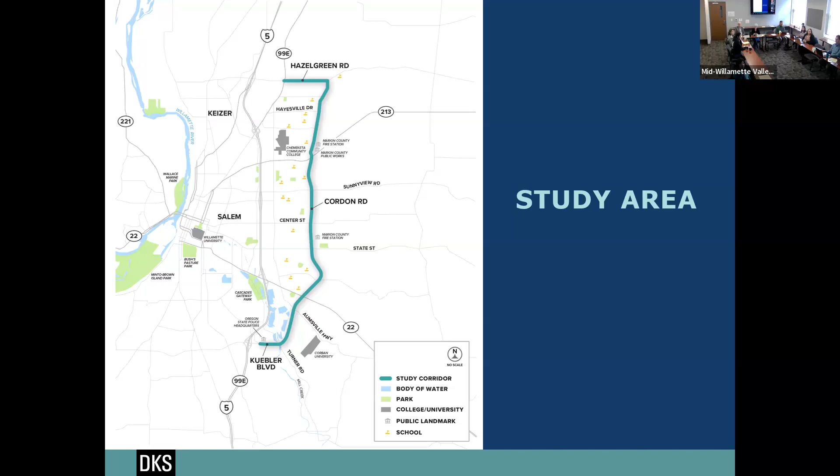Thinking through the original intent for this project, there was a very clear need for a shared vision and some consistent guidelines for access management along the corridor. It spans different parts of Marion County and the City of Salem, with a lot of transition between the two, and really the goal is to ensure that the corridor will function safely and efficiently into the future.

We had 6 main goals that drove the project, established at the beginning as part of our project management team, our advisory committee, and input from the public. Our main goals were: safety, to enhance safety for all modes of travel on the corridor; ensuring efficient movement of both people and goods; connecting users to destinations within and beyond the study area; supporting existing industry and enhancing the physical, social, and economic well-being of residents in the local area; making informed and responsible stewardship of financial resources; and finally, providing consistency with adopted plans and collaboration amongst all of the jurisdictions.

One thing I want to mention is that this corridor includes the potential future interchange at Oregon 22 and Cordon Road. That interchange has been studied several different times in previous studies. This project specifically focused on a plan for the corridor with or without that interchange being built — we did not assume the interchange would be there. We're really trying to make sure this project lays out a vision for the corridor either way.

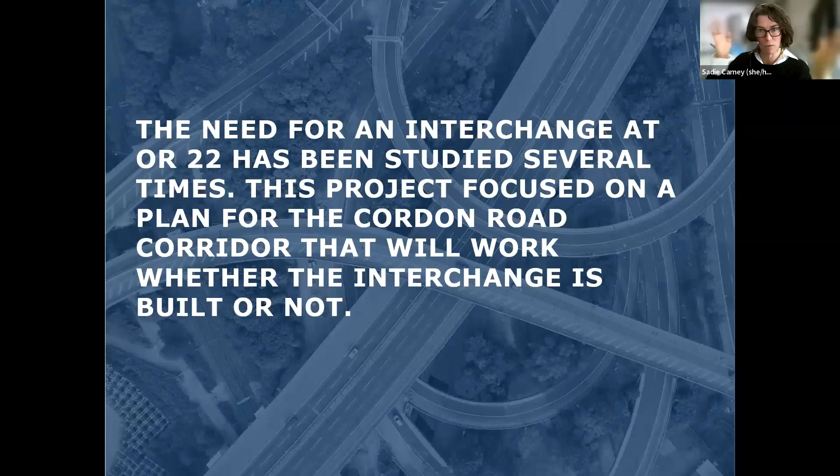I was just curious, there was a bullet on a previous slide and I was hoping for clarification — there was kind of a mixed message, I wasn't sure if existing industry meant we're supposed to be framing our minds around industrial zoning, or if existing industry is inclusive of all kinds of commercial activity going on. Yeah, it's basically all existing land uses along the corridor, existing businesses, residences, everything out there today. Okay, I just wanted to make sure I was understanding our aim here.

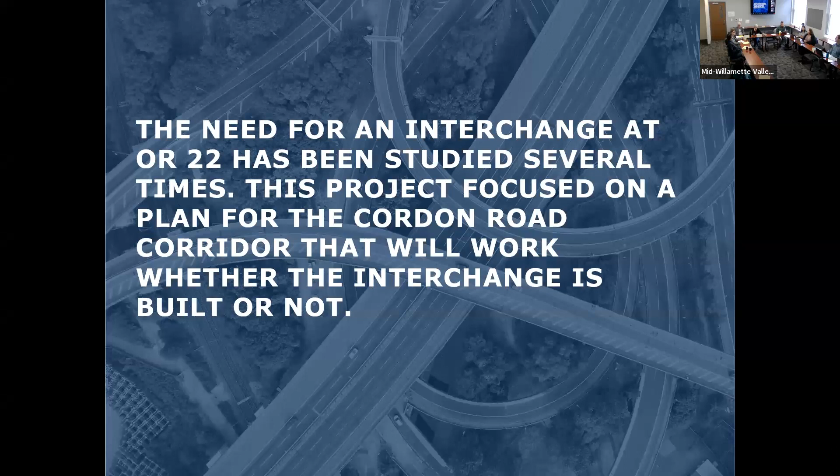Follow up — so the land uses, you have land uses in operation today, but there are also ones planned for on the Salem side, inside the UGB. So was that considered in this? So if it's not yet developed but it is zoned for X, that has been factored in. Okay, thank you.

We then did a detailed evaluation of the existing safety, multimodal safety and operations needs along the corridor. We also looked at the future 20-year potential need for vehicle specific demand, since that's what we have in our travel demand models, taking into account future development along the corridor based on the zoning and what would be allowed. We also had 2 open house events, which I'll touch on in more detail in a moment.

From all of that information, we developed 3 different alternatives for potential cross sections and traffic control along the corridor. We then took that back to the public and used their input, as well as our scoring criteria from the project goals, to settle on a selected preferred alternative, and then used that to develop a prioritized project list.

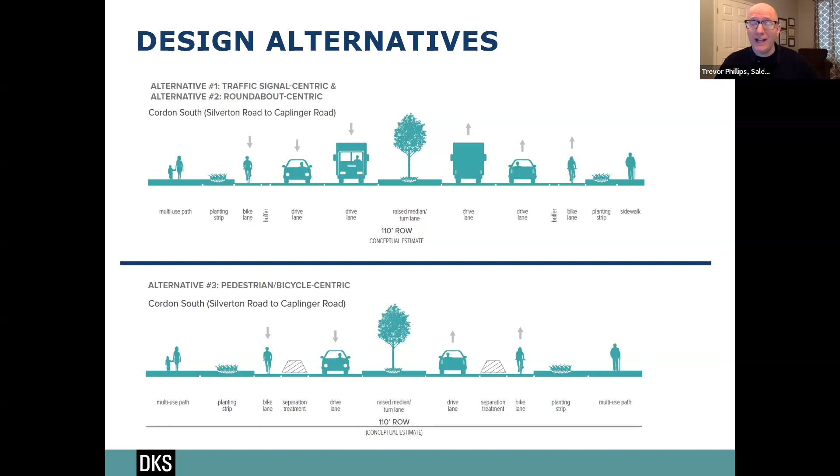Councilor Phillips has his hand up — it was mainly to second your comments, Chair Clark. That overpass where Cordon Road goes over 22 is all the things you said — it's not safe or adequate for this corridor. So thank you for highlighting it. Yes, correct, I was listening.

I'm raising my hand back up. Okay, go ahead. Sorry, can you back up a slide please? Down where you're identifying the definition of interchange, it says an interchange at the junction of Highway 22 and Kuebler — is that Kuebler there, or is it? That should be Cordon Road. Good catch, thank you. Okay, yes. Okay, thank you.

So after we evaluated all of the needs along the corridor, we came up with 3 different design alternatives. The main difference is that alternatives 1 and 2 had essentially the same cross section: 2-lane roadways widening out to 4 lanes with a center raised median, and enhanced bicycle and pedestrian facilities on both sides of the roadway.

The main difference was the traffic control. Alternative 1 assumed traffic signals at all of the intersections. Alternative 2 looked at roundabouts where they were feasible along the corridor as that traffic control. Alternative 3 was what we called our bicycle pedestrian centric alternative, where we did not expand the vehicle capacity along Cordon Road. We did widen the road within the right-of-way available, specifically to enhance bicycle and pedestrian facilities — showing separated bicycle lanes, much wider shoulders, and multi-use paths, but that did not add capacity.

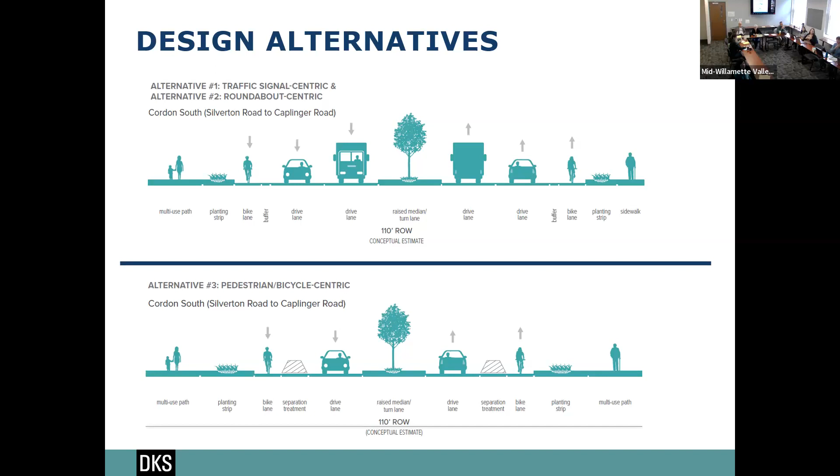So we took those 3 alternatives and brought them to the public, receiving a lot of great feedback in our open house number 2. We had about 170 people complete online or in-person surveys, with both online and in-person open house events. The in-person event had about 60 people attend, mostly residents along the corridor.

We used feedback from the public during that time, as well as our selection criteria from the project goals, looking at safety, mobility, connectivity, economic development, the feasibility of those projects, funding potential of the alternatives, and of course input from the member agencies from both the county and the city.

Looking at where we landed with our selected preferred alternative, it was kind of a hybrid of all 3 — that's where we ended up.

So the very north end — I'm going to go through this corridor piece by piece. Jenna's handing out a hard copy of this for those in the room, and we can email the hard copy to those on the phone.

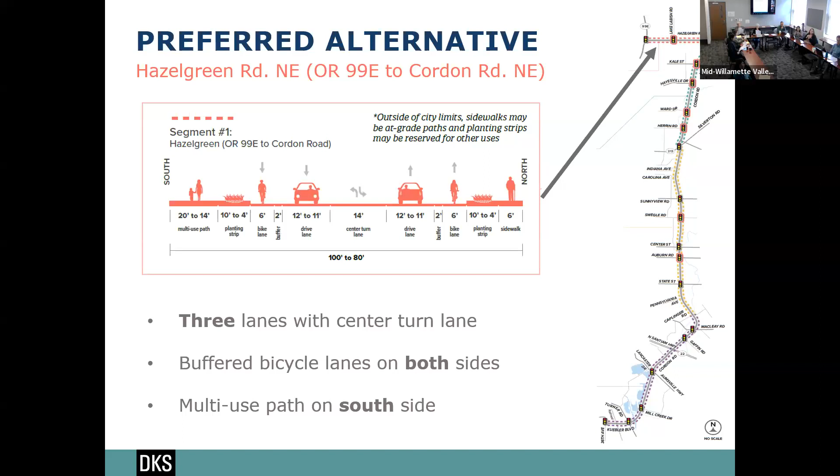Next, moving from north to south along Cordon Road between Hazelgreen and Silverton Road: again maintaining 2 vehicle travel lanes, adding a center raised median, widening the shoulder on both sides of the roadway. On the west side, the city side of Cordon Road, there's a wide multi-use path for both bicyclists and pedestrians. This difference between the multi-use path on the west side and the very wide shoulder on the east side reflects the county/city, urban/rural context — Cordon Road is that boundary and serves both purposes, so we're trying to match the cross section of the roadway for both contexts.

Question: so on segment 2, there are a number of intersections that need receiving lanes for the turn movements. Are those — so you'll have to have the gaps in the raised median. You can't go straight into a travel lane.

Yes, so this segment is kind of in between intersections — this is what the cross section would look like. At all of the intersections, it would widen out for turn lanes and receiving lanes as needed. But in between intersections, there would be 1 travel lane in each direction, which is what's out there today.

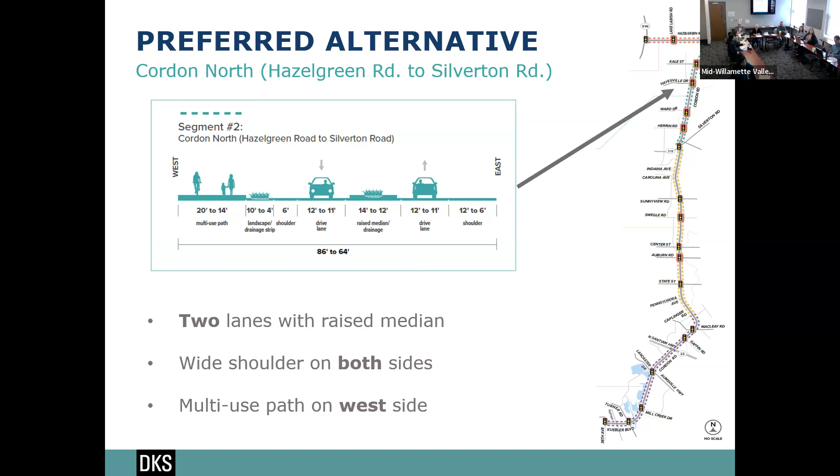Go ahead, next slide. So moving farther south, south of Silverton Road is where the vehicle volumes are significantly higher. So we've widened out to 4 lanes, 4 vehicle travel lanes at this stage, still maintaining the wide shoulders on both sides as well as the wide multi-use path on the west side of Cordon Road.

One more. And then the very south segment, this is primarily in the city limits, so the entirety of Cordon Road is within the city jurisdiction here. Again, that 4-lane cross section. The main difference on the south section is that there is multi-use path on both sides of the road, primarily because of the level of development and zoning that exists today and could exist in the future, accommodating bicycle and pedestrian travel on both sides.

Anna: I just want to make sure I understand what you were talking about before you moved to this segment, which would be limiting the left turn out to go southbound on this whole corridor. It looks to me like that would happen for this section as well. So I think what I'm hearing is the whole section will not allow, like if you're on the east side, you can't turn left and go southbound on Cordon. Correct. Okay, so really it's going to be an access control move for the entire section, correct? Correct.

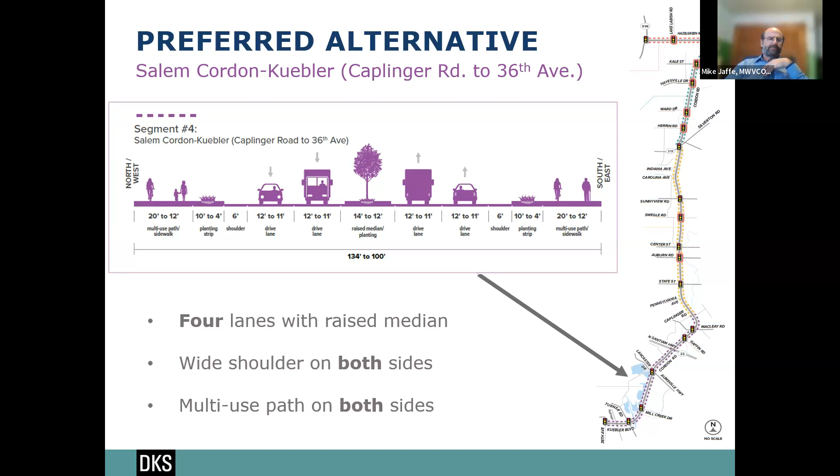Makes sense, because of safety reasons, right? I mean, it's a busy road. Yeah, is that what - I think that's what you were saying. Sorry, I missed it. Yeah. So that's where - so that we did confirm that? Yes, okay. Because we're treating the east side as rural. Correct, and the west side, that's how it's - yeah. Sorry, I missed your point, Katie.

Councilor Phillips? Yeah, I just want to confirm that in this part that's purple, that's in the city, I don't think there are any residences that back up to this part of the corridor. So there's no driveways. As long as there's no driveways, I think this proposal is okay.

And then I guess it's not in the jurisdiction of the city, but the part that's north, it looks like on - I'm bad with the names - Hazel Green has the center turn lane because there's a lot of residences. I'm just curious why they chose not to have the center lane for left-hand turns in the northern part of Cordon. It looks like there's a lot of driveways in that section, and that's why they typically have that center turn lane.

Yeah, I would say the biggest driver for that decision is safety. And yes, there are a lot of driveways in that section, and that's also where the highest density of crashes and fatal and severe crashes are happening. By eliminating those left turn lanes, you're drastically improving the safety of the corridor.

Okay, so it's literally like we understand based on engineering that it's going to be difficult for the residences that back up there, but there are so many safety issues that stand out that the recommendation is to build something that creates a force function that really limits residential access. Okay, I can understand that. Thanks for letting me process it.

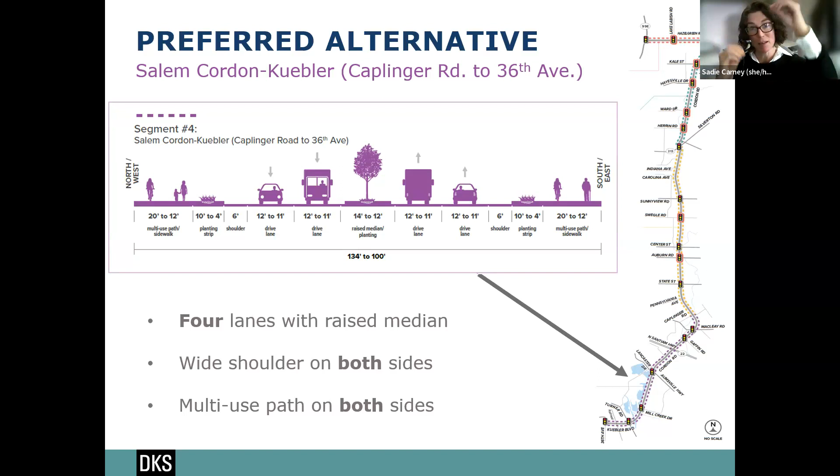Sadie, then Trevor. Thank you, Chair Clark, and thank you, Maria, for those comments about students. I'm also thinking, going back to Trevor's earlier concerns about vehicle speeds and roadway design lending itself to different kinds of travel behavior when you're in a car. When we have those limited lights and signals, that puts a big distance between the opportunities for a pedestrian to cross, unless they're doing so illegally. And four lanes is a lot for a kid to make it across. I wouldn't want to think about a student or anyone attempting to cross.

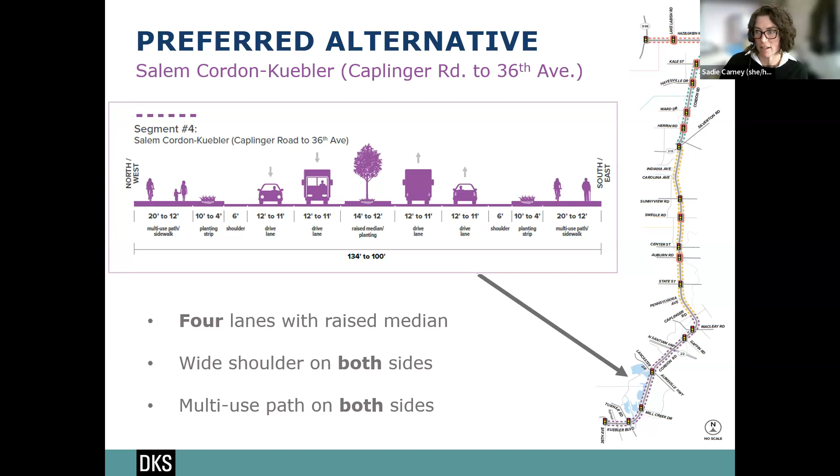I wanted to just clarify for the consultant group. I'm looking at the comments that were submitted by Transit to the project website, and they say: in support of potential future public transit service on Kuebler Boulevard, Cordon Road, and Hazel Green Road, pedestrian infrastructure should be provided where ADA compliant bus stops would conceivably be built. If speed limits are 40 miles per hour or above, bus pullouts shall be provided as designed for a 40-foot bus in the figure on page 700-11 of the ODOT Highway Design Manual. So I just want to clarify for the group and the consultants that Transit is supportive of pedestrian infrastructure on both sides.

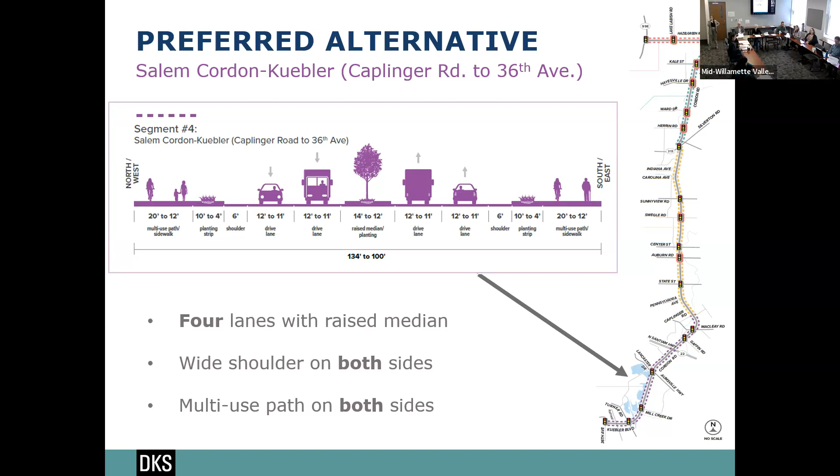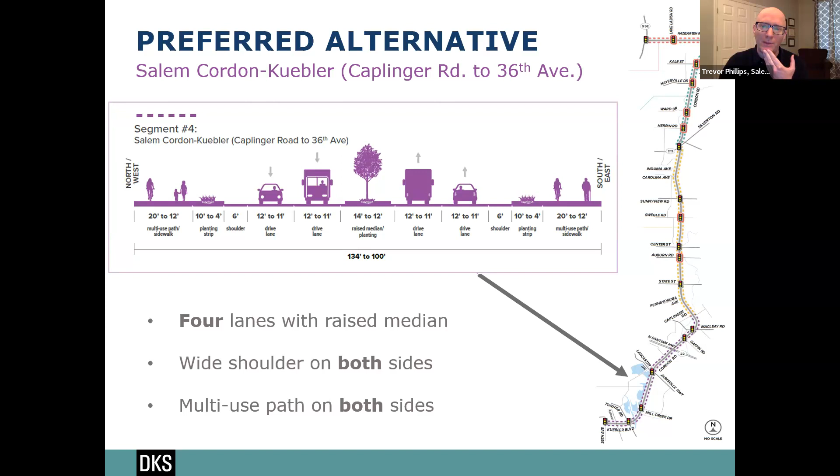Thank you, Chair Clark. I think it would help me if we went back to, this is like segment 4, if we went back to maybe segment 3 -- and this would be north of the section 4 we were just discussing. So I hear the concerns of Member Carney and Maria Hinojos Pressey regarding having infrastructure just on one side. I guess my question is, currently there's no infrastructure, no sidewalks on either side in much of these areas. Is the intent of the up to 12-foot shoulder to kind of function in lieu of having a sidewalk? I understand that probably saves money, and it acknowledges that one side of the road is county, and it's better to have some infrastructure as opposed to none, which is the current state. But it would help me understand that wider shoulder on the county side, the east side.

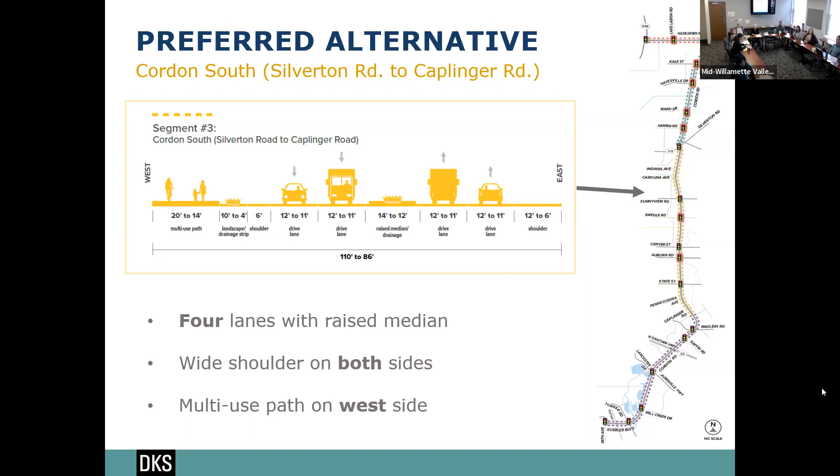So we kind of briefly touched on this, but the circled intersections here on this map would all have upgraded traffic control, so new traffic signals or roundabouts.

The roundabouts are definitely the traffic control that would improve safety the most, and would also really help facilitate those U-turns that would be required after people turn right out of the local streets and driveways.

The roundabouts are specifically focused on the north side, north of Silverton Road, where we have that two-lane cross section, as those could be single lane roundabouts. The project team, looking at funding and feasibility, focused the roundabout recommendation at those locations where they could be single lane roundabouts.

On the south end, at some of the signalized locations, we looked at the potential for even a dual lane roundabout, and those were not sufficient to handle the future volume forecasts that we had. So we retained traffic signals farther to the south in the corridor, and focused those roundabouts on the north end.

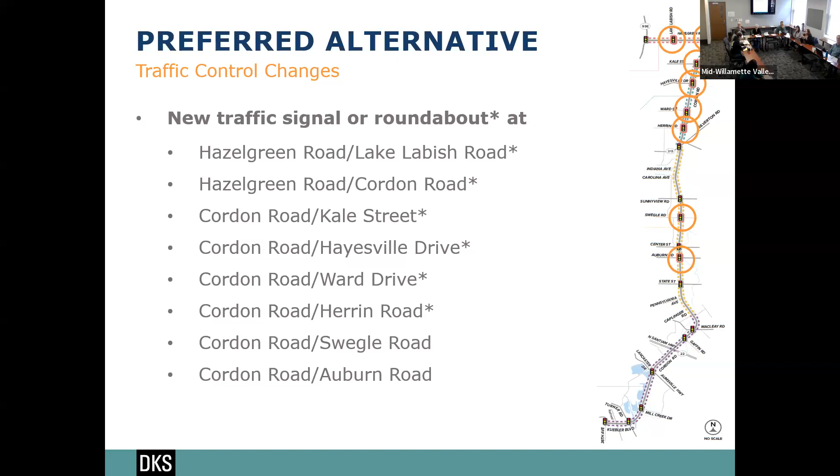Love me those roundabouts.

This actually works in our favor because it's not a full movement driveway. So even a right-in, right-out driveway like we have still reduces travel speeds. But having full movement access impacts mobility as well as safety. So really we're trying to balance the need for retaining access to these properties and local streets, while really trying to improve safety and reduce crash risk.

And so the plan also outlines strategies and best practices, as well as suggested criteria for managing access in the future.

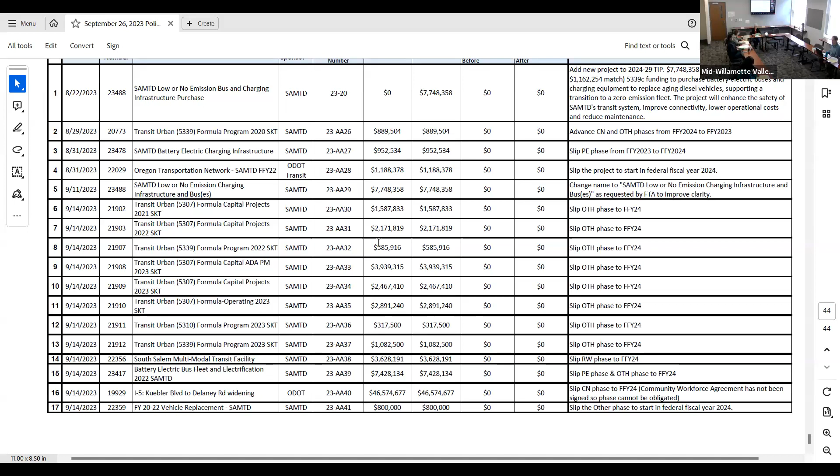The very first one is an instance we talked about last month, the battery electric bus addition and approval for purchase by Cherriots. But all the rest of these were administrative amendments and didn't impact any new funding coming to our region, just a list of administrative changes. I'm happy to talk about any of them specifically if anyone wants to, but the majority are programmatic transit projects, things like regular preventive maintenance and operations and capital projects. So that's my report, unless there are any questions.

And for folks who love all the different fiscal years, the federal fiscal year starts on Sunday, October 1st. Sure does. Seriously, they have to be special. Always, yep, thank you so much for keeping track of all of those.

Much appreciated. Other business: the Oregon Transportation Commission will meet on November 9th in Portland, and December 11th will be a virtual meeting for the OTC. The next SKATS meeting will be on October 24th, and we'll be considering the adoption of the McGilchrist and 22nd project. And then we'll have a presentation on the Cherriots Transportation Options Strategic Plan.

Looking forward to that. And then the next TAC meeting will be on October 10th. You also have the status of 3 of our planning projects: the Metropolitan Transportation Safety Action Plan, the Oregon Travel Study, the update to the Turner TSP, and then we will continue the discussion on adding Aumsville to our MPO, and that will be in November.